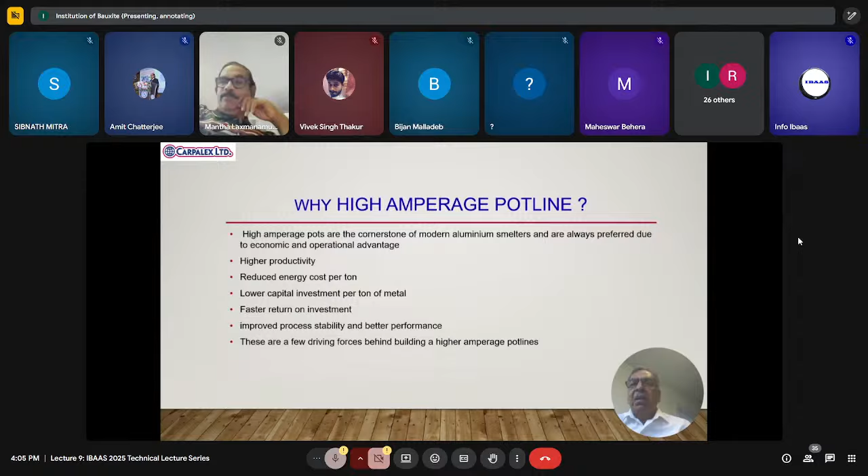Improved process stability and better performance. So that's what you will see more of, better pot performance, in the subsequent slides, which I'll show you. So these are the few driving forces which are behind building high amperage pot lines.

The next point, which I just want to emphasize, and don't take me wrong that I'm endorsing, it's nothing like that, but I just wanted to share my experience. So the modifications in the anode design, lining improvement, magnetic compensation, and control strategies of DX Plus and DX Ultra Plus technology, where I have worked extensively, result in a highly stable and promising pot performance, which fits the description I just mentioned above.

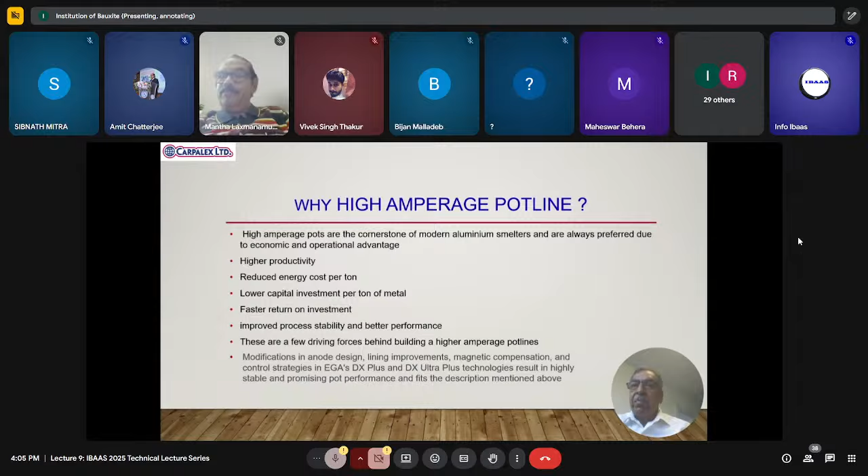So I just want to inform you that my presentation today is divided into two segments. One is the preheat. In preheat, I'm just focusing on the resistor preheat, not the gas-fired preheat. And the second part is the bath-up or the startup. So let's see what are the steps which are followed in the preheating. So why do we preheat? What is the objective? Pot preparation for the preheat: how do we prepare the pots? And raw materials. Mainly the raw materials, as you know, are crushed bath, pure crushed bath, or maybe cryolite, graphite, or petroleum coke, or soda.

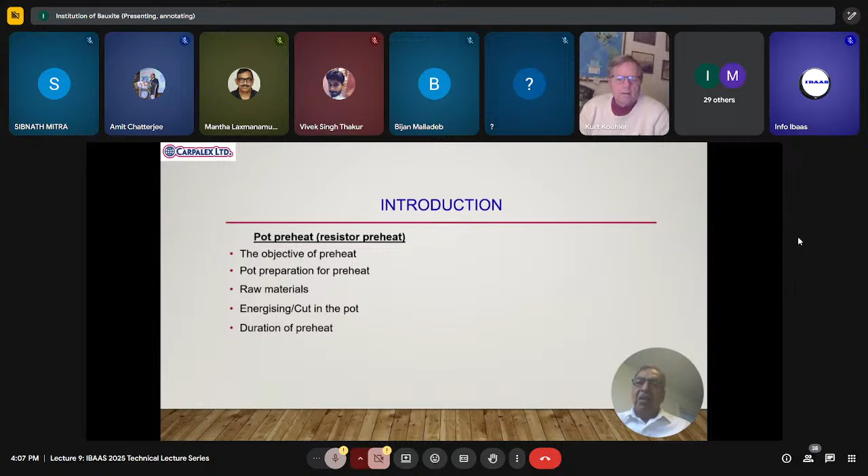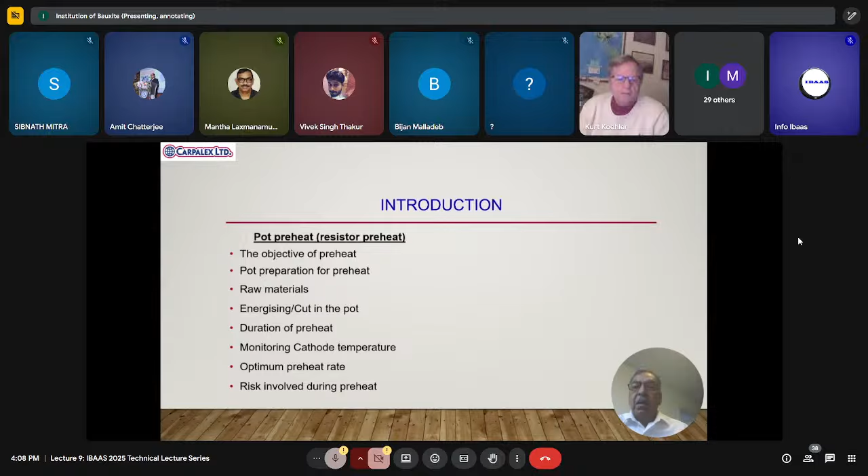So let's go to the next step. After the pot is prepared, we energize the pots, we cut in the pots. Some places use the term energizing, some places cut in, some places startup. But actually it is not a startup, it's just energizing. We have not yet started the pot at this stage. And what should be the ideal duration of the preheat? And what should be the rate of preheat? Then once the pot is cut in, we have to monitor the cathode temperature and other parameters, of course. I already mentioned optimum preheat rate. And what are the challenges and risks involved in the preheat? We'll discuss all this in the subsequent slides.

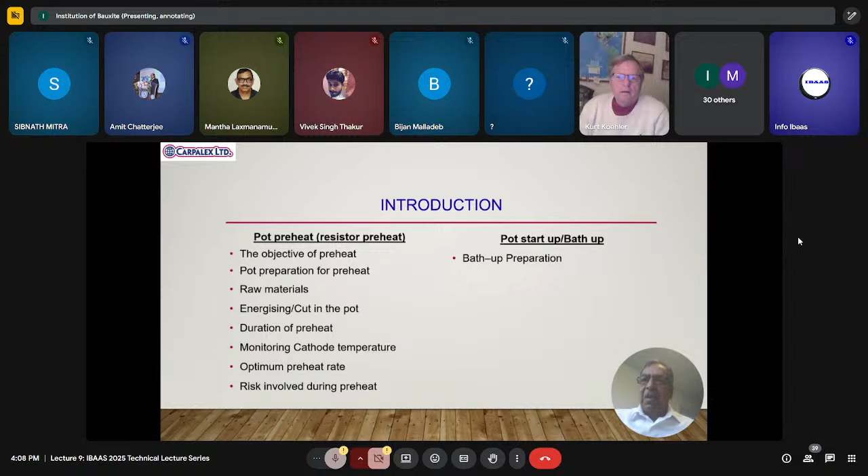And as I mentioned, the second segment is the startup. So what are the steps we need to follow? Bath-up preparation. Here I don't mean how to generate bath. Bath-up preparation means the pot is already preheated, it's just a couple of hours before: how do we prepare to tap the bath? We'll see in the next slides. Then comes the bath pouring. This is also an important point: we need to pour the bath in a very gentle manner, and you have to ensure that as soon as the metal comes, we stop. But we'll discuss that in the next few slides.

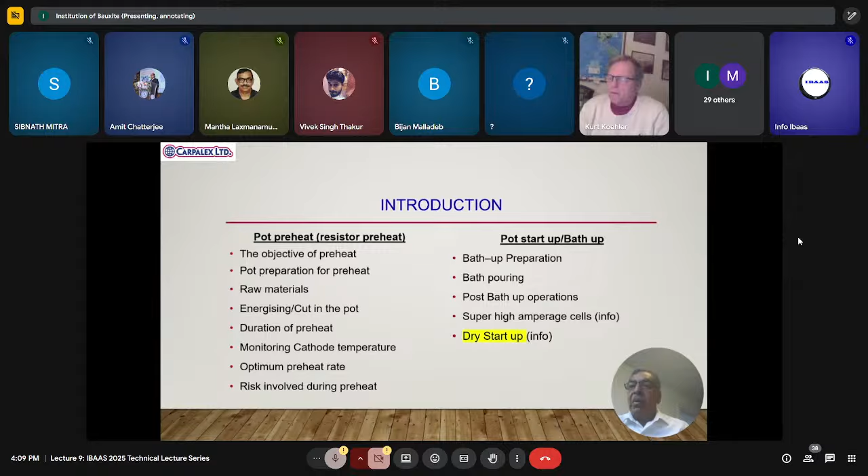Then once the startup or the bath-up is done, what are the post-bath-up jobs which we need to do? So post-bath-up operations. And then I have a couple of slides for the super high amperage cells. These are not today's main focus, but just for information's sake, I thought I must put a couple of slides. This is again the dry startup. I will not discuss it, although it's very important. Dry startup and early life are both very important parts of the startup, but unfortunately I do not have enough time. Probably in future there will be a separate subject for the dry startup and the early life.

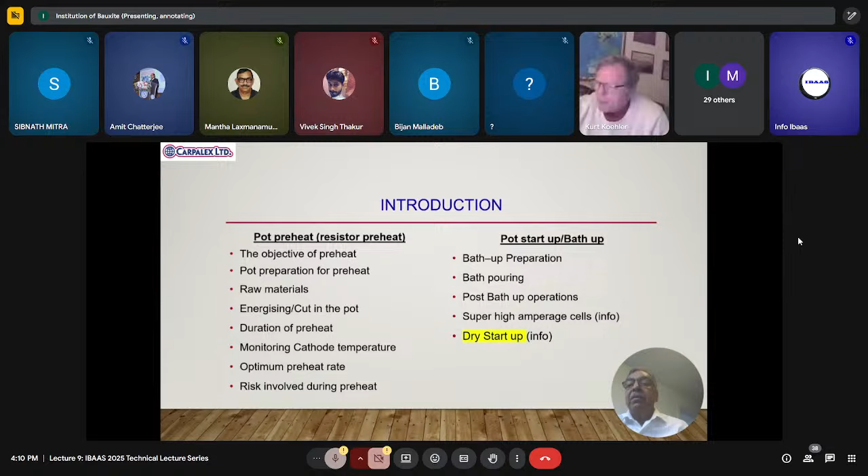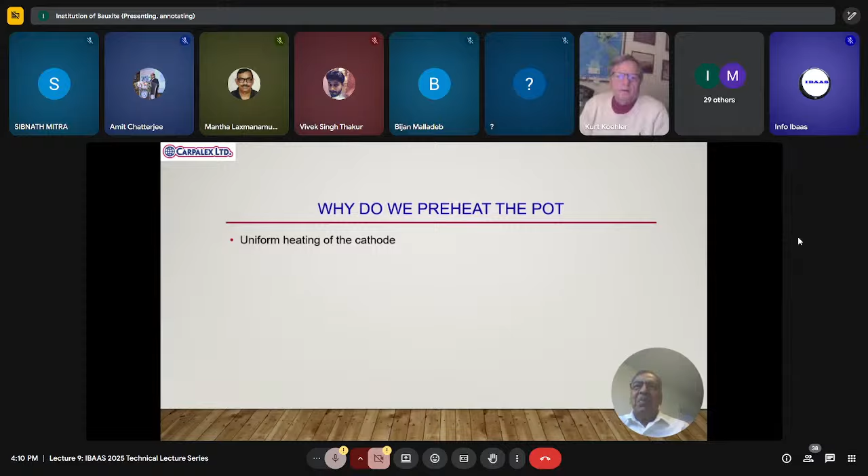So as the first point, objective of the preheat. Why do we preheat the pot? The main objective is the uniform heating of the cathode. By uniform heating, that means cathode temperature should be as even as possible, with the minimum gradient. Also, it's not only the cathode preheating, it's the preheating of the lining as well. So that is one of the main objectives.

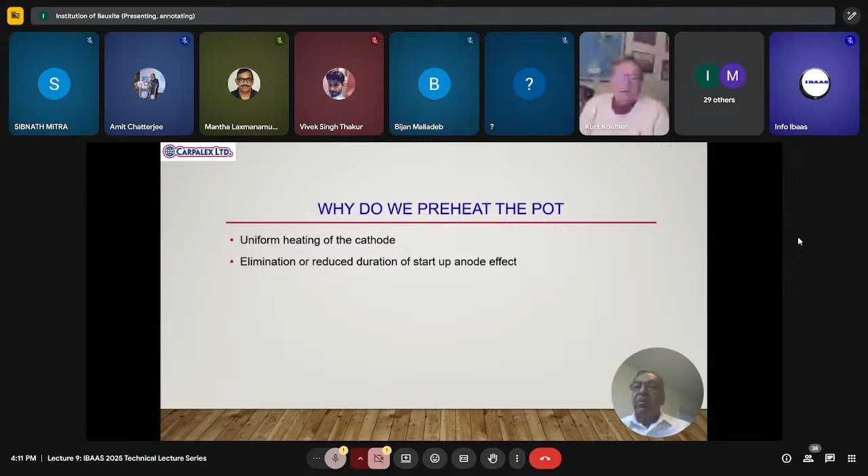Elimination or reduction of startup anode effect. If your pot is very well preheated, you will probably eliminate the first anode effect. Some technologies, some people prefer to have one first anode effect. To bring cathode block temperature close to 900 degrees centigrade or more; more is always preferable. In the technologies where I worked, we have achieved up to 950, 960 degrees centigrade as well. Then quick stabilization of the pot after bath-up, low voltage. Again, it all depends upon the preheating, so we stabilize the pot faster.

So reduction of the risk of bath and metal infiltration. So obviously, if the pot is very well preheated, the chances of developing the cracks are not there at all. So bath and metal cannot infiltrate in the cathode.

So elimination of cathode air burn, so hot spots. Sometimes it so happened that temperature touches 1100 degrees centigrade below some of the anodes, and then it's very risky. We start oxidizing the cathode, and so these are some hot spots which are developed.

And protection of the lining, of course, as I mentioned earlier, the lining is also protected if it is very well preheated. So chances of leakage through the lining are not there because it's very well baked.

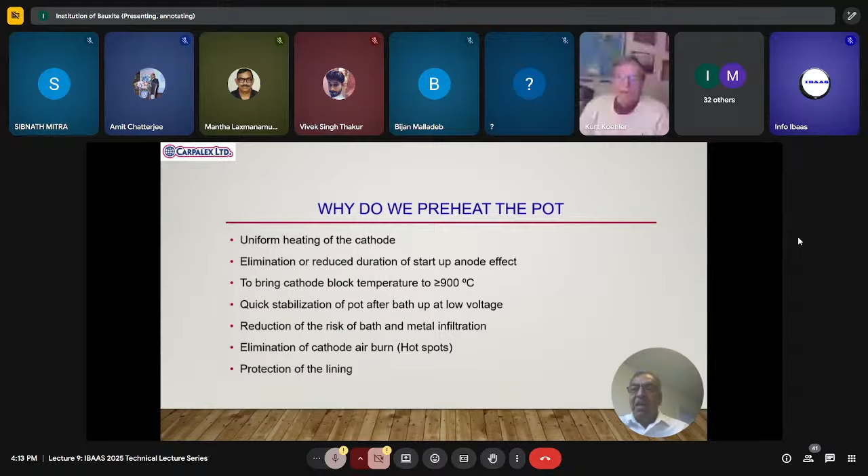So pot preparation for preheat. It's a very, very important point here, because if a pot is perfectly prepared, its preheating will be very well done, and post bath-up conditions will be very, very favorable, and it will help. So this particular point, the preparation of the pot for the preheat, must be done very carefully.

So there is a very extensive checklist before a pot is handed over for the preparation, maybe 45 points, and it starts from collector bar flexible connections to the superstructure hoppers and checking of breaker feeders, the beam movement, etc. It's done by a separate crew actually. Although it comes under the startup team, it's a separate crew which does that. And then they hand over the pot to the pot preparation teams.

So basically under the startup team, you can have many teams as required, but an inspection team is generally a dedicated crew. And same thing with the startup preheating crew. That is also a dedicated separate crew. So once they clear that this pot is ready for the preheat, we start preparing the pot.

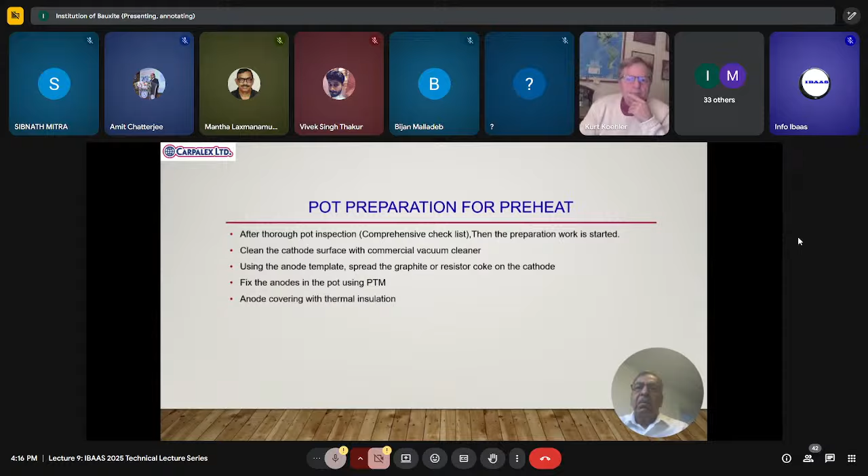Anode covering with the thermal insulation. This is also an important point, just to avoid the heat losses. So the gaps between the anodes, however small, are covered with the thermal insulation, or what we call Kaowool, or you can say glass wool, or any insulation.

Then next is the preheat flexibles. So we fix the preheating flexibles. Of course, before that, the steps. I already mentioned that it has to be properly insulated. And then the side wall and the end wall are loaded with the crush bath and soda. Generally it's a sandwich covering: first we put the crush bath, here a pure bath rather, and then the soda, and on top of that again a crush bath.

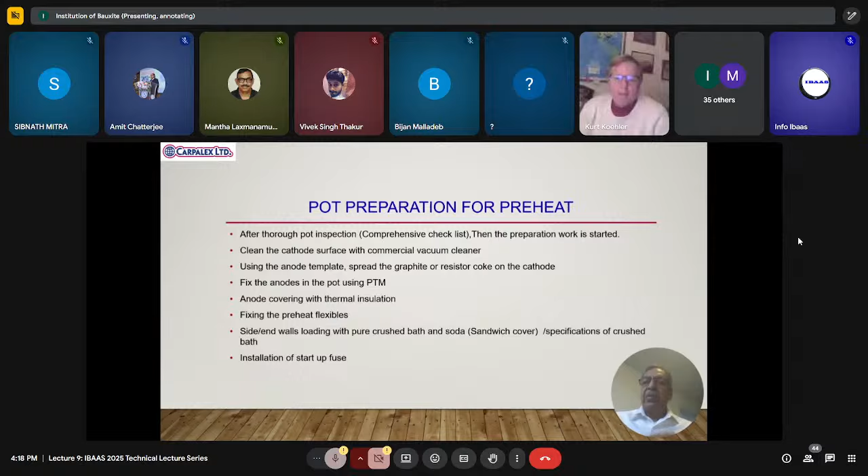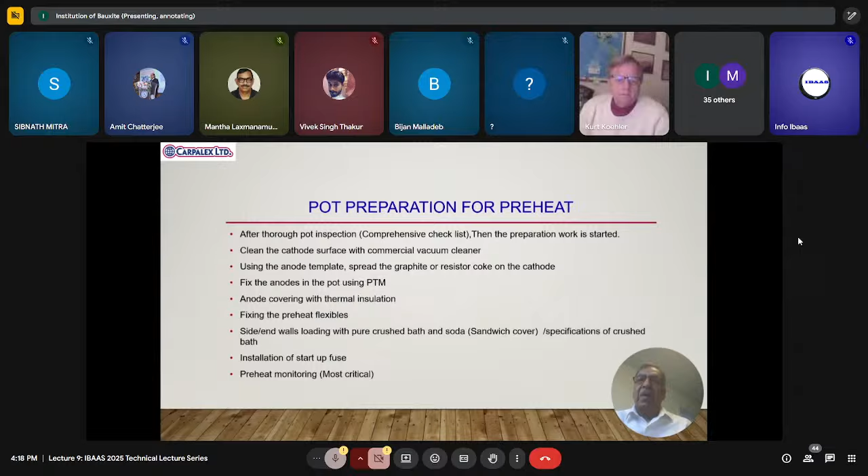So then installation of the fuse plate, that is the startup fuse, and then the preheat monitoring, which, as I mentioned, is one of the very important aspects. So I'll go to my next slide.

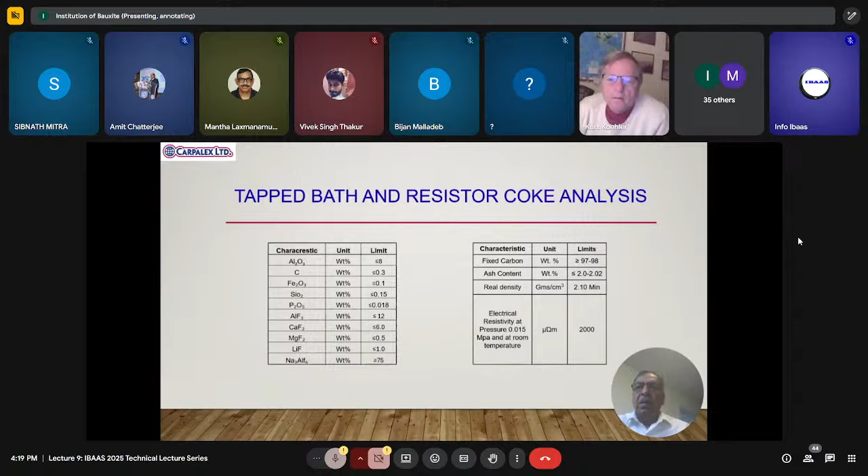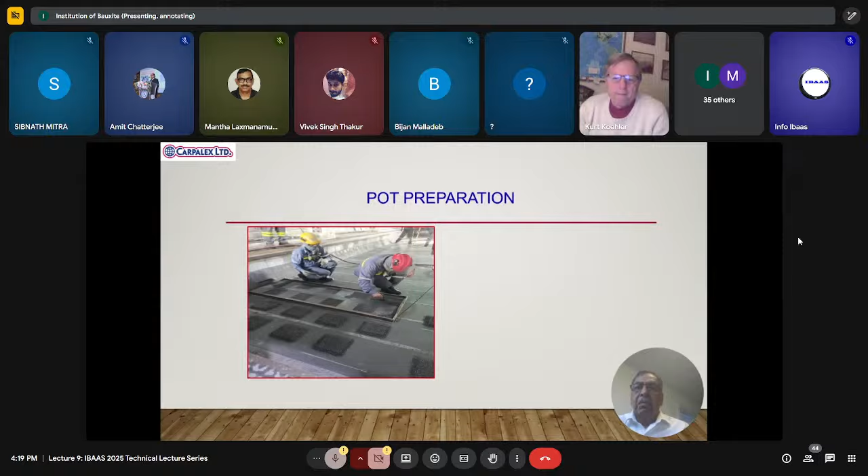Now my next slide is the pot preparation, which I'm continuing. So some steps. You started seeing the picture. So as you see, this is a template, and this template is exactly the size of the anode. I mean, you can imagine how big an anode is.

And these are the square resistor coke bed. So every technology has their own pattern. Some places they use the square, some places circular.

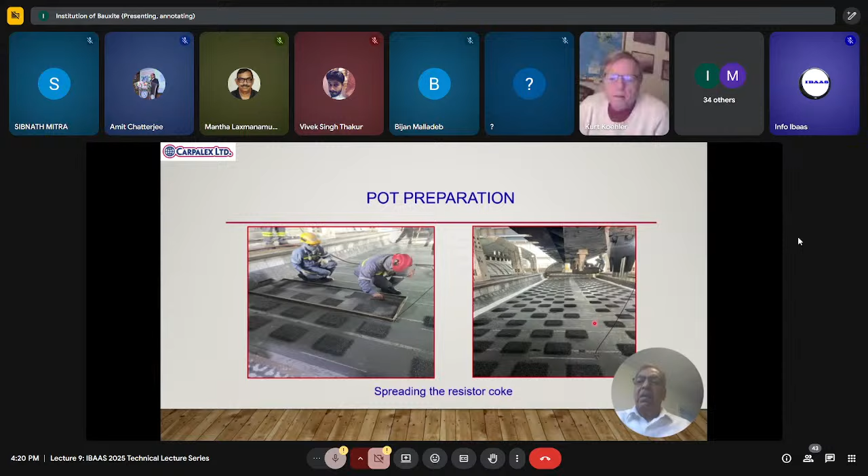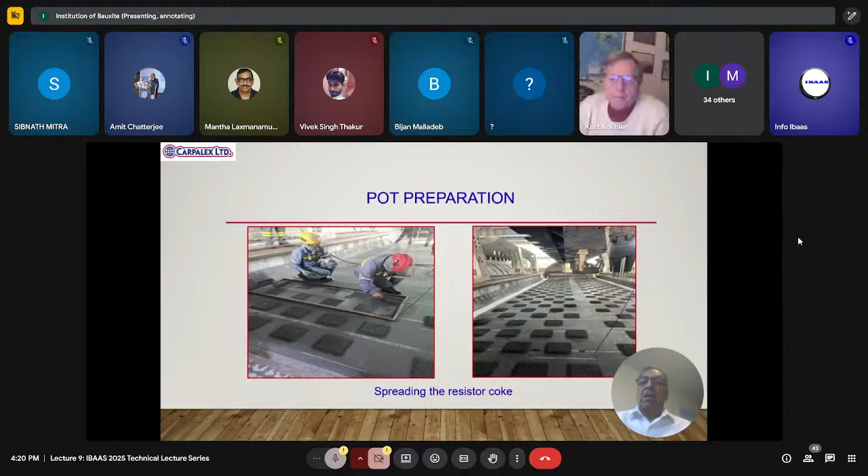I should mention that in the center channel, generally under the 5 breakers or 4 breakers, on the size of 400 to 500 kiloamps, there are 5 breakers. So under the breakers, the hole is done on the cathode and thermocouples are installed, just to take the temperature. So let's go to the next screen.

This is also pot preparation, but a different technology. You could see different anodes. I was telling you that the gap between the two anodes is covered with insulation. So that is what I meant.

You could see that on the back wall it's kind of blocked, so that once this back wall is covered with the crushed bath, nothing goes inside. It remains there. There are plenty of materials available for this - some people use cardboard. Of course it generally burns, but hardboard remains there, it protects.

Some places they use steel. But this one is an insulated material, so it remains there, so there is no chance of issue. The steel plates which are used generally are not preferable these days because they get warped after the heating.

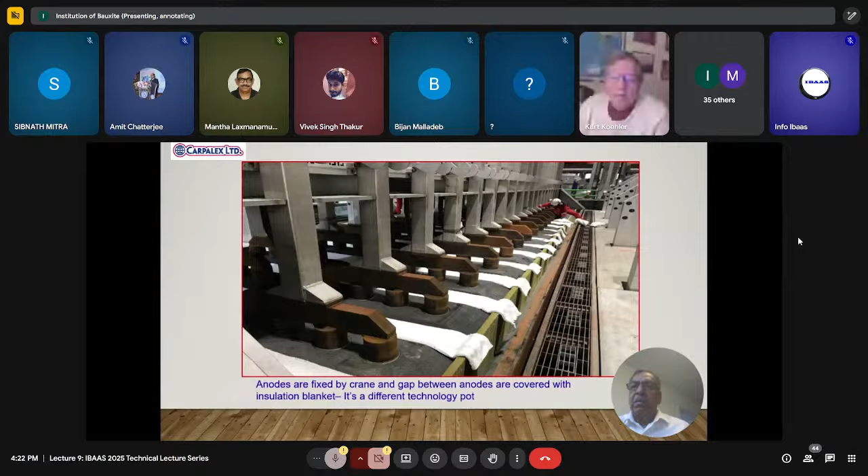So this is a different technology pot which we have seen in the previous slide. Let's see what's there in the next slide.

Here you could see that there are some chalk marks on top of the stubs or the pin - some places it's called pins or the stub. These chalk marks are done to facilitate the covering of the anodes. So anodes are covered only up to this height and not more.

And this is only during the preheating. This doesn't apply for normal operation. So this is again an important point - it's only for the preheating, because some technologies have certain designs for heat losses, just to maintain the thermal balance during preheating.

So this is covered, and once the operator sees this, it's controlled in a better way. He knows that he has to cover the anode only up to this side. On the right side, you could see that the pot is totally prepared after this and all through. Basically, it's covered with crushed bath, soda, and again crushed bath.

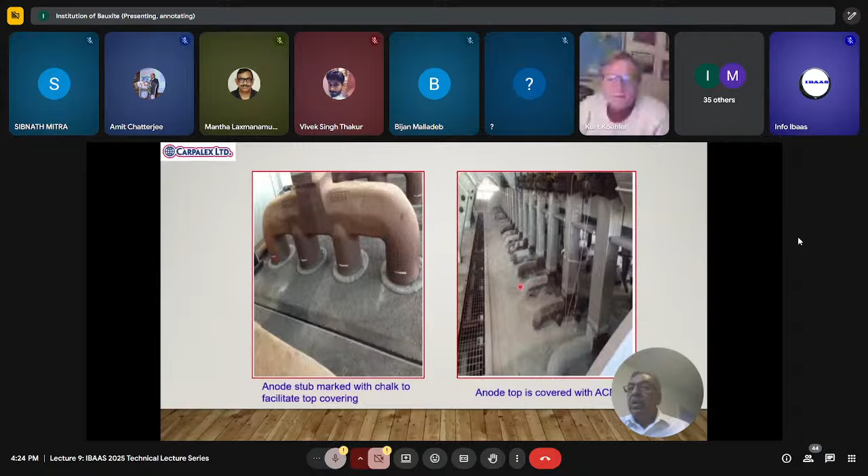One more thing which is very important - the 4 corner anodes, one here on the tap side too, and the duct side too. In some technologies, on the duct side there is a door. It's very important, because when you start the pot, you skim the carbon from both ends. So these 4 corner anodes are very well covered, and also on the deck plate we put some thermal insulation just to avoid heat losses as much as possible, because we lose a lot of heat from the sides.

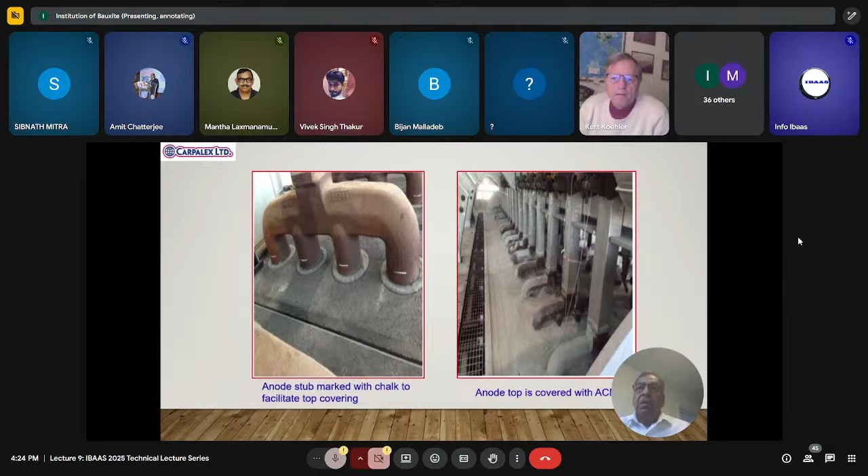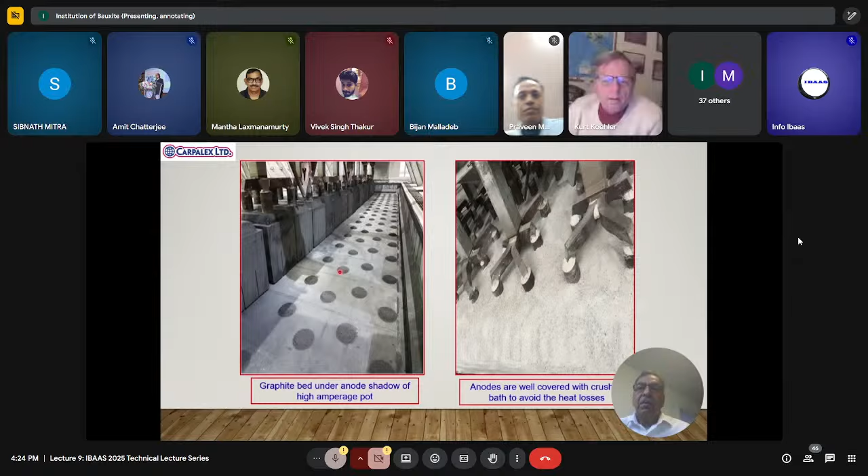So let's go to the next slide. You could see that here the graphite bed is circular, and as I mentioned, it's a different technology, not the one which I showed you before.

Here, if you could see, these anodes are covered almost full, right up to the pin, which was not the case in the previous slide. And also you could see that this is not ACM, or the anode cover mix.

This is pure crushed bath, and generally this pure crushed bath is used, and this type of arrangement is done for dry startup, because after a certain period of time, say 44-45 hours, you could see that the crushed bath is already started melting, and people use the crushed bath or pure bath from the top of the anode to put it into the center channel. That is the purpose.

These anodes are covered with pure bath, and not with the anode cover mix, because anode cover mix has about 45% alumina, which is not desirable for the startup, dry startup rather. So I'll go to my next slide.

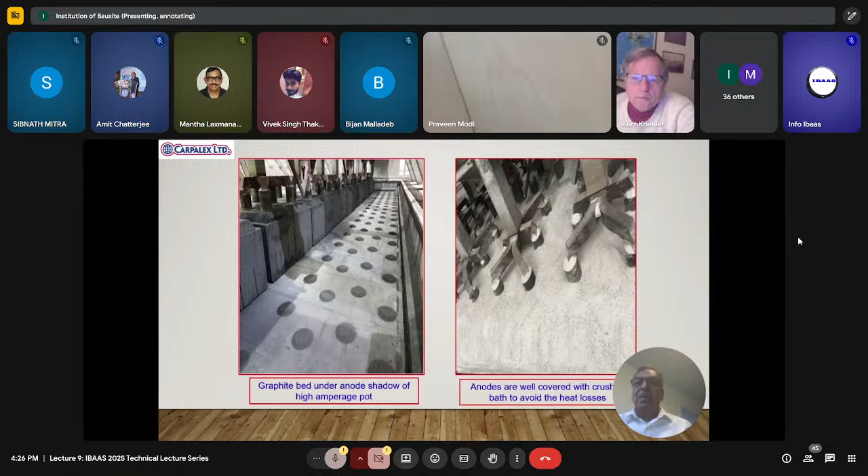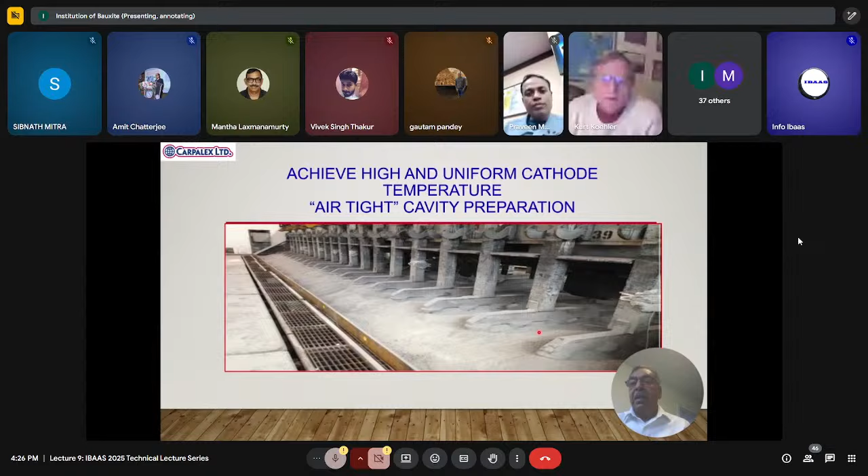So it's just again a picture. You see that what is mentioned is achieve high and uniform cathode temperature, airtight cavity preparation. Again, you see that it's covered completely. But you could see that there is enough gap between the yoke and the top of the anode covering.

So it is very critical. It has to be, so that air should pass through, just to make sure that these pins are not getting red hot. I'm not very sure whether this is a dry startup arrangement, but I can tell you that in this technology, the temperature they reached about 960 degrees centigrade up to the preheat. So I'll show you the graph in the next technology, as to my next slide.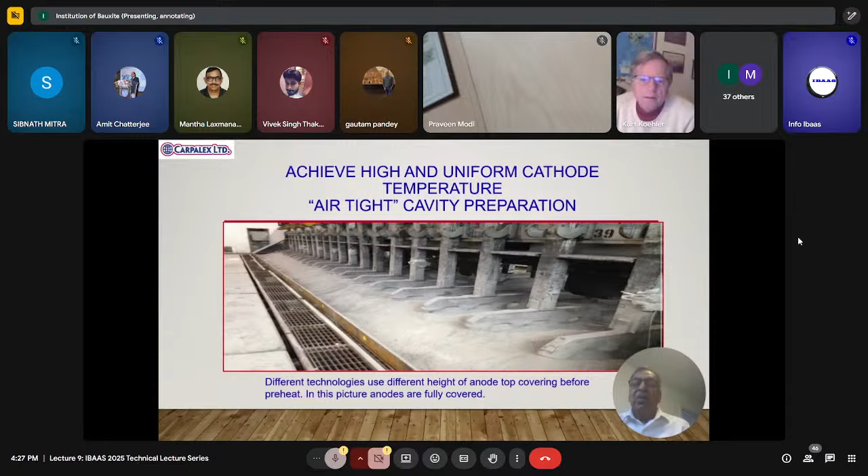So I was mentioning you before the fuse plate. So what is the fuse plate? Fuse plate is simple, an aluminum plate. There's a hole in between, and its thickness varies depending upon how much is the kiloamps. So if it is higher amperage, the thickness goes a little bit more.

So in case of new pot line, when we build the new pot line, this fuse plate is installed, or fuse plate is welded by the construction team. But what happens when it's a second generation pot or third generation pot, do we still fix this? And if yes, then how? We can't weld on the live pot, 500 kiloamps, you can't weld it. So what do we do?

So generally, there's a, I think it's a used Hilti gun. So there are two kinds of rivets. So we use the Hilti gun to put one rivet here and one rivet here. Contact is not as good as it is welded, but to some extent, yes, contact is there.

So it's better to put rather than not putting at all, because when we remove the last wedge, it's very important that this fuse plate is there in place so that it reduces the spark which is generated by the last wedge. And that is the main reason that in the generally higher amperage pot lines, this fuse plate is used. I'm sure it is used in even 200 kiloamps pot also.

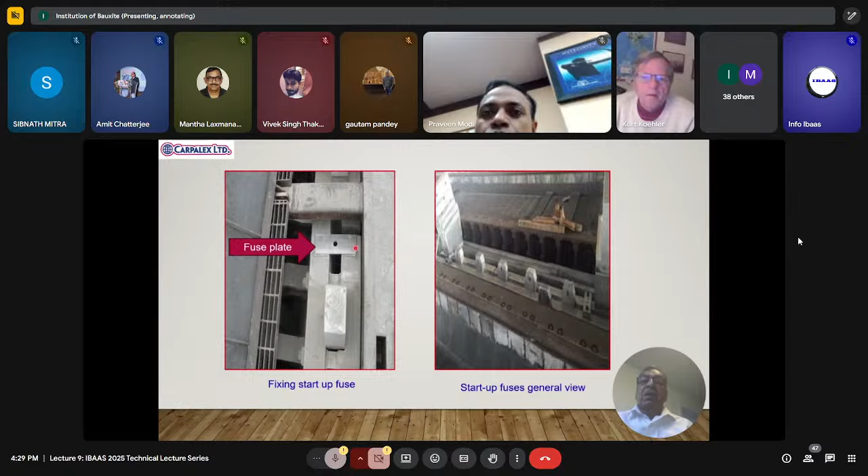And on the side, this is a general view of the starter. Here you see that startup fuse is fixed near the riser. It's near the riser, so it's the first riser. Some places in the second and third generation pot, they use even the nuts and the bolts. But I do not know whether it is good to do it with the nuts and bolts, I don't have any comment on that.

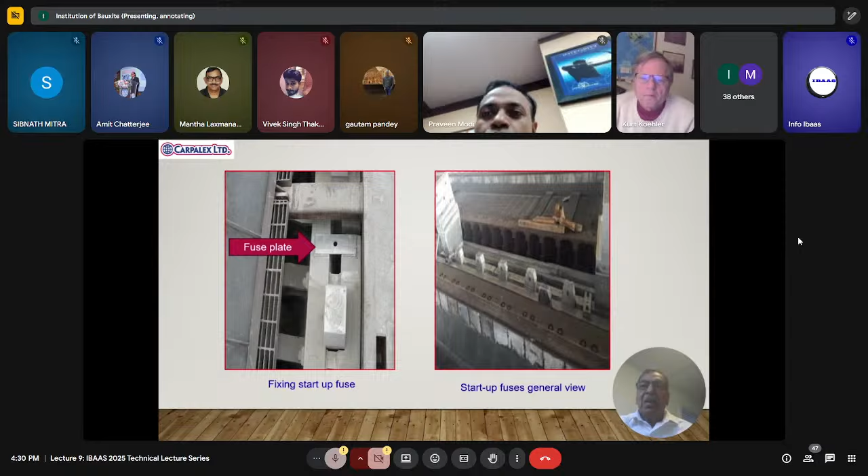So you see the flexibles are there. Here one more important point is there that, although it was there in the checklist earlier, the startup in charge has to ensure that the duct damper is totally closed. For the gases, it is in the closed position. So it is 100% closed, but there is always a gap so that in the periphery of the damper, some gases always go there.

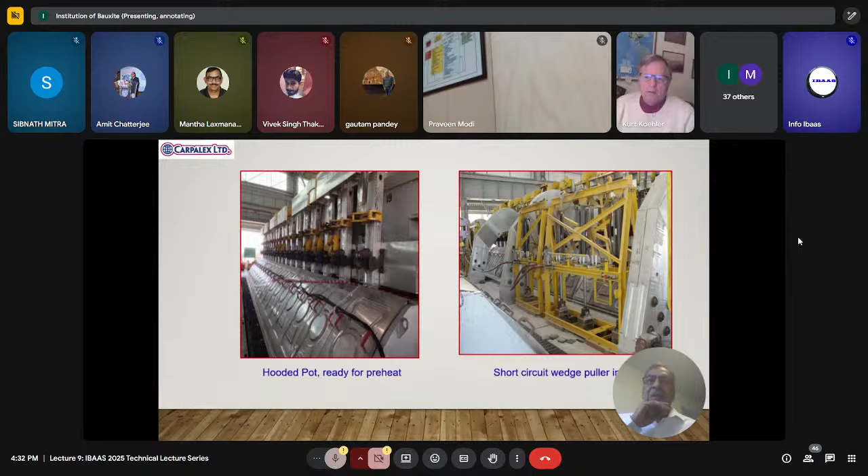Here the wedges are removed immediately, one by one. So one wedge is removed, once it is done, the second is removed. Second is done, third is removed. So this way, the whole pot is in circuit within a short period of time at full load. It's a full load, so we're not putting any shunts on this pot. So let's go to the next slide.

So cut in and energizing the pot - this is a very, very critical operation. Prior to cut in the pot, we have to ensure that, as I mentioned, the dampers are in closed position. Somebody has to re-verify that.

Using the wedge puller device, as we've seen before, all the short circuit wedges are removed one by one, but not in proper sequential order. So you could remove number 2 first, or number 6 first, whatever you want to. It's not that we have to go sequentially.

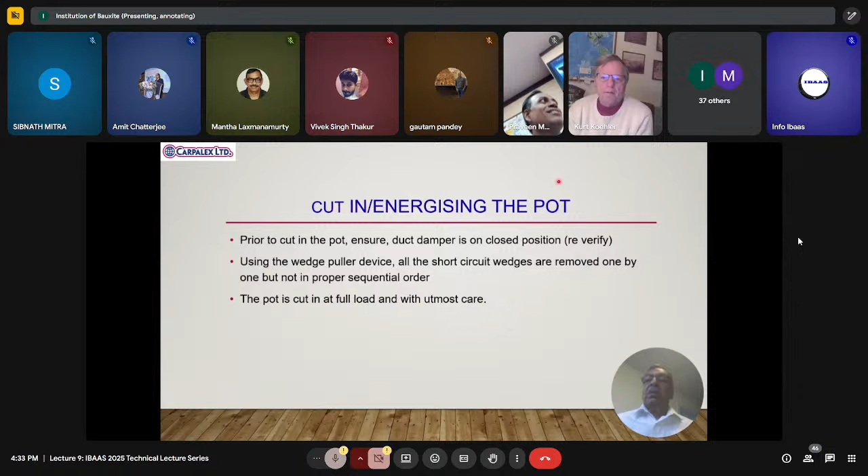The pot is cut in full load and with utmost care. But since this is a very important operation, energizing the pot, some senior man should always be there, and also the power plant is on standby. So in case of any eventuality, any emergency that comes up, they're always in touch on the radio.

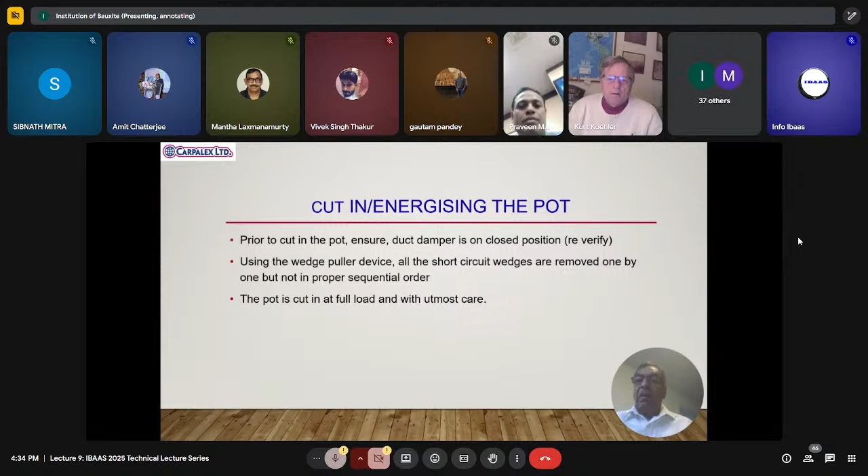So what can happen? For example, I'm removing the wedge and one wedge is stuck. If one wedge is stuck, what happens? It will start getting hot because the whole load is coming on that. Eventually it will melt, and then there's an open circuit situation. So just to avoid these kinds of things, the power plant is on standby, and the maintenance crew is also there. This is an important operation, and therefore a senior person should always be there when we are cutting the pot.

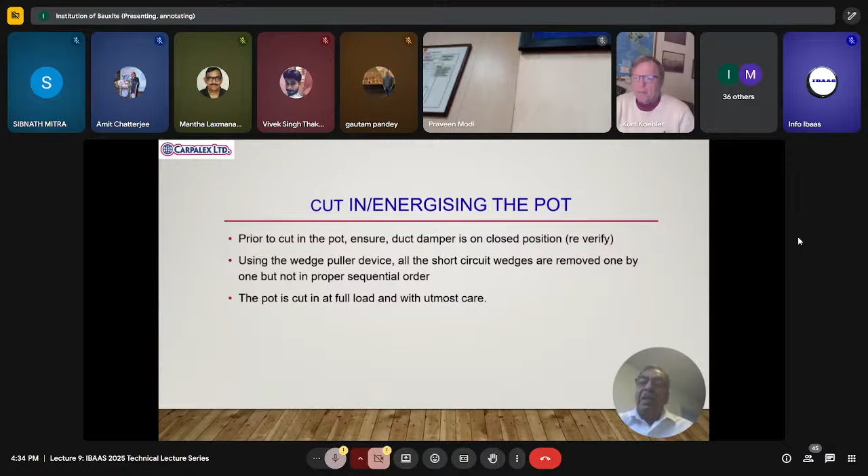Let's go to the next topic: monitoring of the preheat. Yes, the pot is preheated, but our job is not yet done for the 48, 50, or 60 hours. The objective is to have good current distribution in the anodes and acceptable voltage drop between the anode rod and the beam, or rod and flexibles, since flexibles are connected to the beam, rod to the beam. Uniform current distribution is very important, because if some anodes are drawing high or low current, you can't expect a good preheat.

These days, some vendors provide devices where you can monitor the current distribution in real time, and the operator doesn't need to go and check the current distribution of each and every anode. Facilities are available, but technology is much more advanced these days. There's also contact voltage drop monitoring. There's a schedule, and periodically somebody has to go and do this operation.

Cathode surface temperature: as we mentioned earlier, during preparation, thermocouples are installed. People generally start taking cathode surface temperature readings after 44 hours, because it's picked up later. Our aim is to have at least 900 degrees and above, so it's not picked up in 20 or 30 hours.

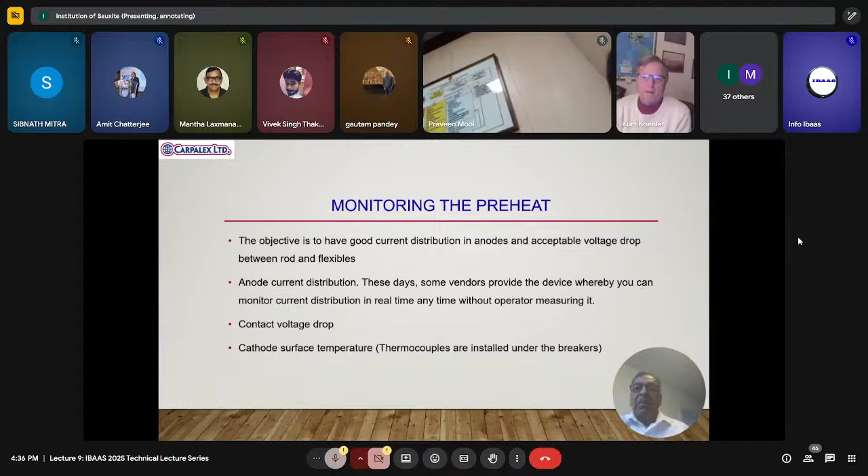And even if we want to pour a liquid bath into a 1000 degree preheated pot, there is hardly any gradient between the liquid bath and the cathode temperature. So it's very, very good, very ideal.

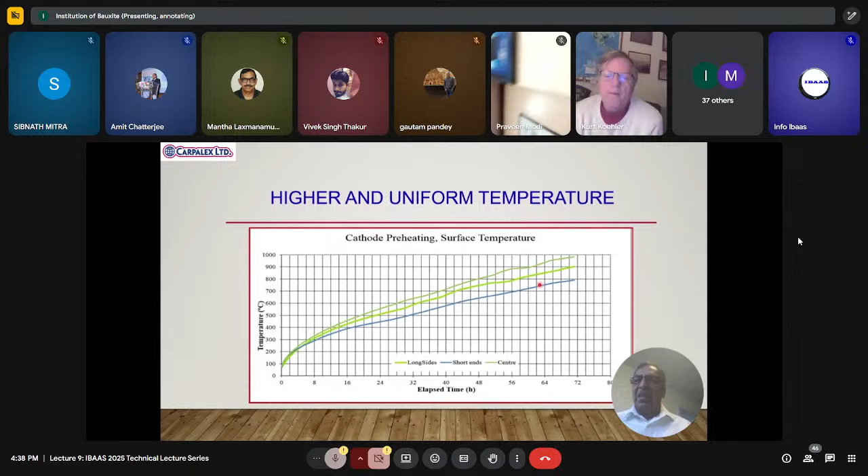So, abnormalities during preheat—what can happen? Uneven current distribution, yes. If there's uneven current distribution, the cathode will not be preheated properly. What else can happen? Hot spots below some anodes, where temperature might reach 1100 degrees centigrade, as I mentioned before, and again, that's not desirable.

Insufficient preheat temperature means temperature will not be uniform, so we cannot bath up the pot if preheating is not done properly. Red stubs or red pins can occur because some anodes are drawing high current. Anode burn off is typically a case of poor anode sealing, poor quality of anodes, and poor quality of pot preparation—probably the contact is not very good.

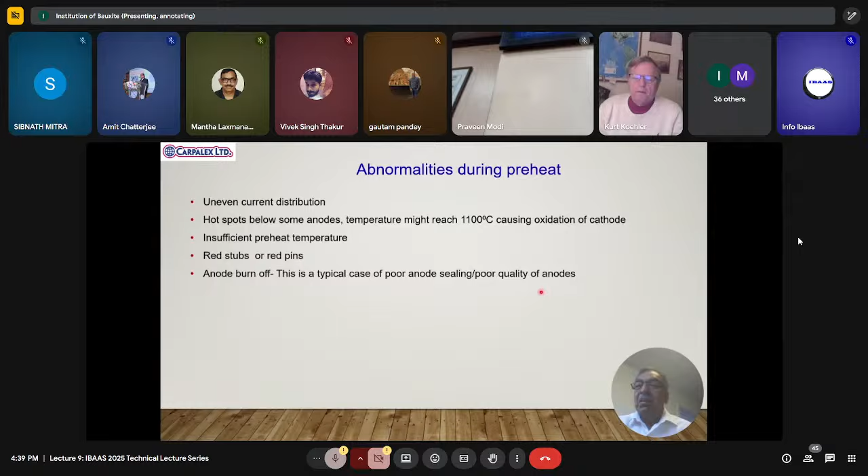It's possible during preheat, although rare, but during preheat I have seen anode burn off, not only in the bath-up.

Higher or lower rate of heating—if it's very high, that's not desirable, and if it's very low, that's also not desirable. So there should be an ideal rate of preheat, considered to be 15 to 20 degrees, with 15 to 18 degrees being very ideal. Again, it depends on technology to technology, how they maintain heat balance during preheat. For graphitized preheat, an average rate of 15 degrees centigrade is considered to be good.

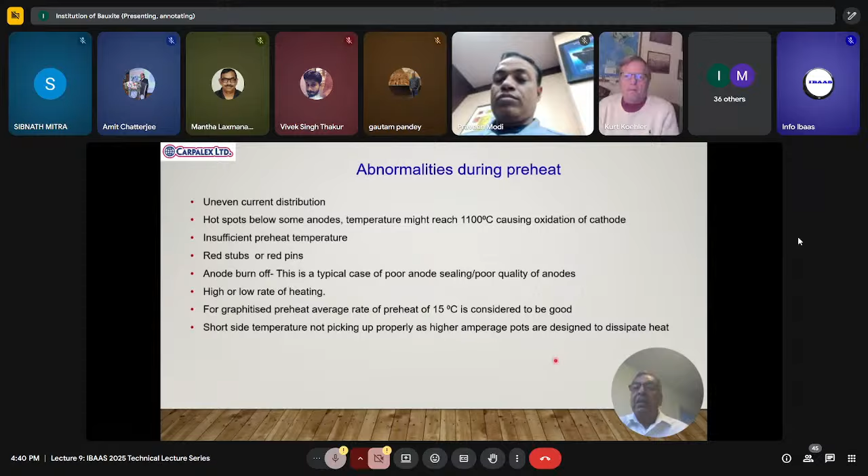Short side temperature not picking up properly, as high amperage pots are designed to dissipate heat. Yes, that is true, but still the gradient should not be very high. So that is why you have seen that I mentioned that on the short side we try to put insulation on the deck plate, and even on the four corner anodes we put insulation.

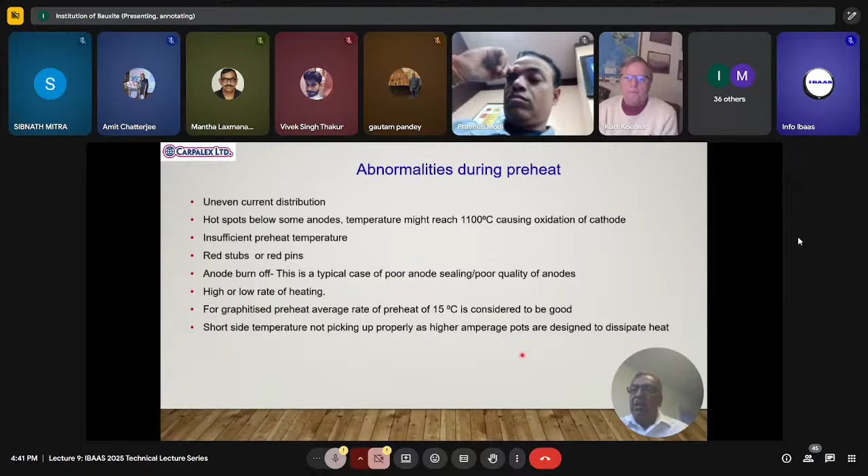These challenges require advanced preheating strategies such as computational fluid dynamics, CFD, for heat distribution, automated control systems, and robust safety protocols. So it's very important. So again, it's a design, how well the pot is designed. These are some of the abnormalities, not all. I cannot mention all, but if a cathode is very well prepared, anode stems are very well grinded, the beam is grinded, then these problems are eliminated. I don't say 100%, but to some extent.

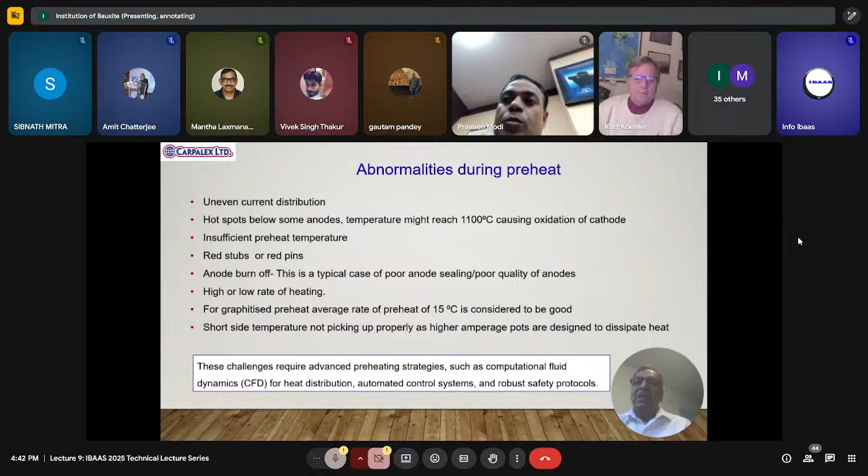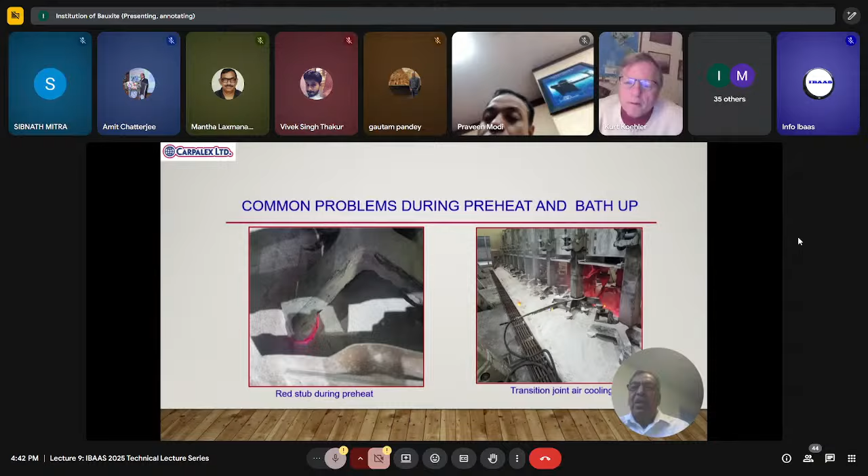Common problems during preheat and bath-up. You have seen that I mentioned red pin or red stub. So this is again during preheat, and you could see on the right side that this is a clad, that is welding between aluminum rod and the yoke. So it gets heated up. Sometimes it gets red hot. So the chances are that if we don't address this problem, then it might drop. Clad may fail, so the rod is separated and the anode has fallen off.

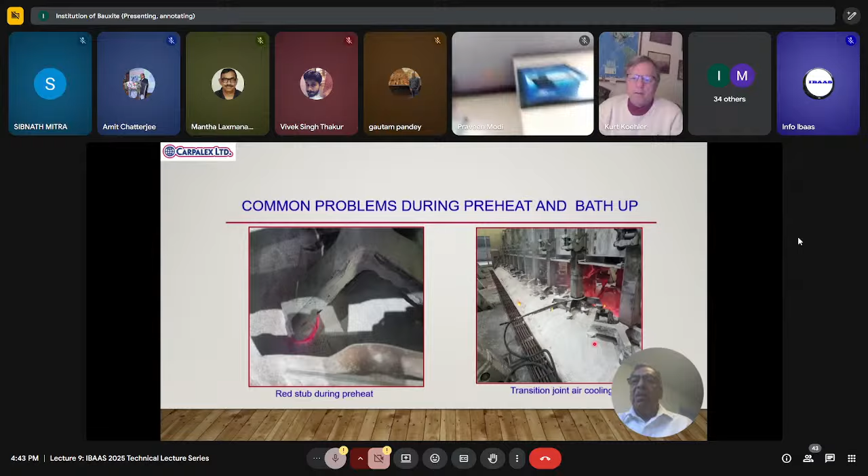It's a burn off. So just as a precaution, when this bath-up happens, the people have to go around and check everything is normal. Of course, every technology has their own procedures. But if it is properly done, these kinds of things are avoided. If the anode is very well sealed, if there is no problem with the initial anode which is fixed, maybe initially there is a crack or minor crack in the transition joint, then the chances are very high that we may have problems during the bath-up or even during the preheat.

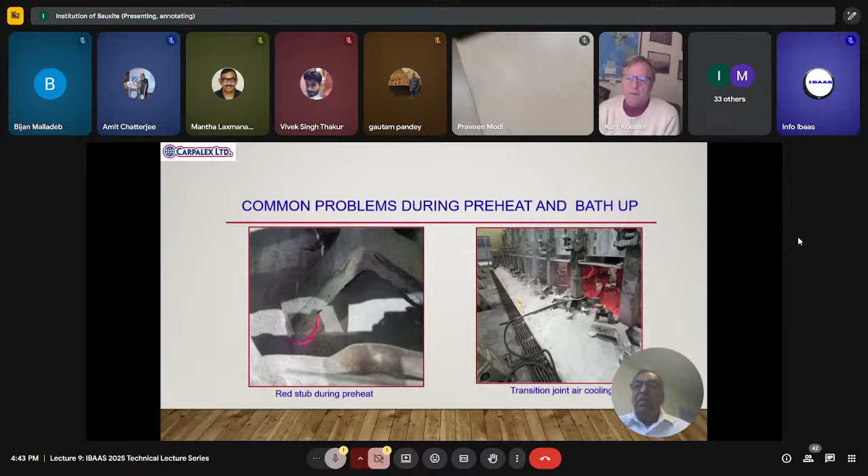So we come to the next part, that is the pot startup or the bath-up. These are the bath-up stages: bath-up preparation, which is preparing the pot for bath-up, and post bath-up operation. Now before bath-up of the pot, what should we do? These are some very basic and fundamental steps, and all of you know about it, but I thought I'll just mention it. We tighten the anode clamps, mark the anode reference with the chalk line, remove the flexibles, and remove thermal insulation blankets. Any startup or bath team knows about these. These are the important things we need to do before we pour the bath.

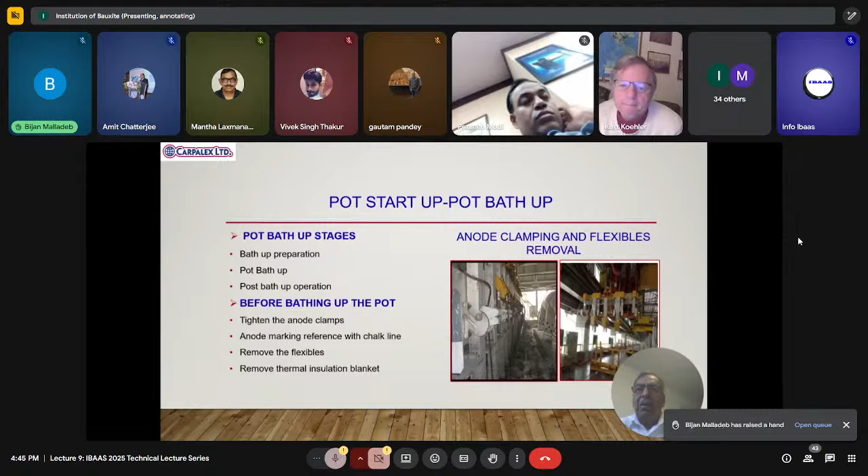So I just put some pictures here: anode clamping and flexibles removal. You see that the anodes are tightened here. The clamps are tightened, and once the clamps are tightened, the flexibles are removed. So let's go to the next slide and see the bath pouring step, how we pour bath.

A predetermined quantity of bath, 13, 14 tons, maybe 15 tons. Again, it depends upon the kiloamps and which technology, because the requirement varies from technology to technology. Some people pour 14 tons, some 15 tons, some pour 13 tons and 2 tons later. So it all depends. But in general, 13 to 14 tons of liquid bath is poured in a very controlled, gentle manner. It's not that we pour very fast and are not aware that maybe some metal is coming at the end. So we have to be very careful during the bath pouring.

The ideal temperature of the bath should be above 970 to 980 degrees centigrade. This is ideal, but if it is 1000 degrees, still it's better. Raise the anode beam while maintaining all anodes immersed in molten bath. Once the bath is partly poured, somebody at the duct side door, as I mentioned earlier, ensures that the anodes are at least half immersed in the bath, and then he gives an indication to the guy on the tap side. Then he starts raising the anodes.

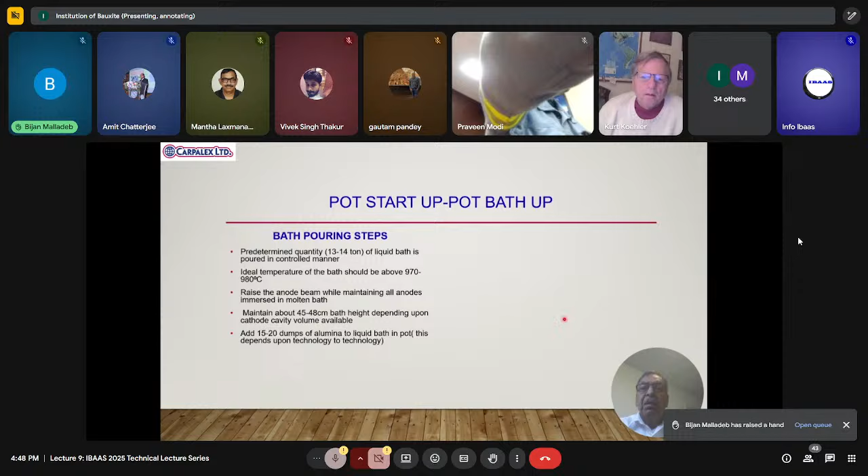because once the crushed bath starts melting and if you have anode effects. So, excuse me. Once it is done, some technology providers advise that we put some alumina dumps just to avoid instant anode effects. But using the tapped crushed bath, which is about 4 to 5% alumina, we can always avoid this. So some people don't prefer even charging these alumina dumps.

Pot voltage is maintained around 10 volts after the bath up, 9 to 10 volts. And normally we declare the anode effect at 8 volts. That is the threshold. But during the bath up, for the first shift, even at 10 volts, we don't declare the anode effect, because this is the requirement. We need to maintain so much voltage because we need to heat up the pot.

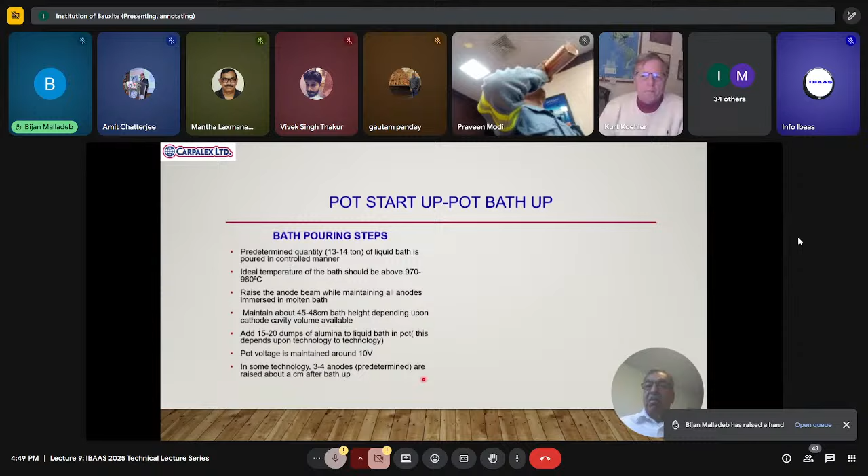In some technologies, 3 to 4 predetermined anodes are raised about a centimeter after the bath up. So again, it's a very controversial point. As soon as the bath up is done, because the pot is so long and the anode beam is so long, they say that probably in the middle, because of the structure, there are 40 anodes or 36 anodes or whatever it is, there is a possibility that the anodic plane is not uniform. So some places they raise 3 to 4 anodes by a centimeter just to maintain the proper anodic plane.

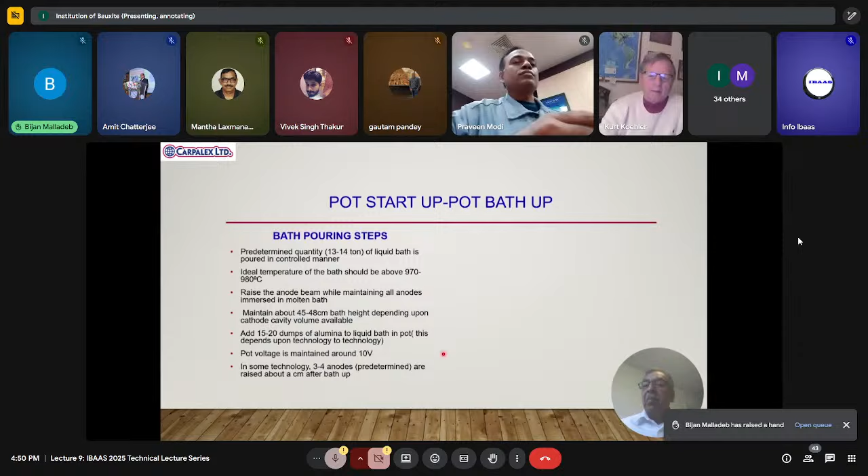Although the current distribution, when they check, we don't see anything. So again, as I mentioned, yes, it's a practice. Some places follow it, and there is no problem in that. There's no issue if you raise an anode 1 centimeter. After 8 hours, in the current distribution, you will not see anything. Even during that shift, nothing wrong happens.

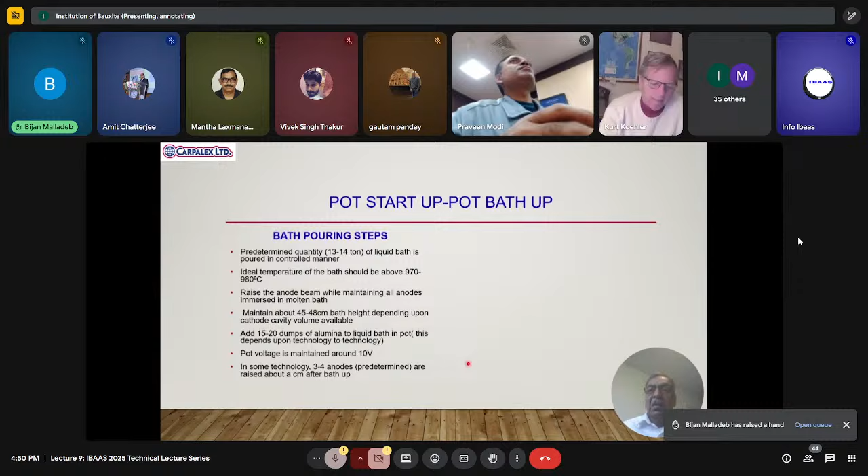So what's the next point? The gas stack damper is opened completely. Earlier I said that during the preheat, it was closed. Now it is open completely. What I mean by completely is that, of course, gas balancing has to be done, but whatever limit, the mark is there, we have to open up to that. This is just a picture which shows that the bath is being tapped for the startup pot.

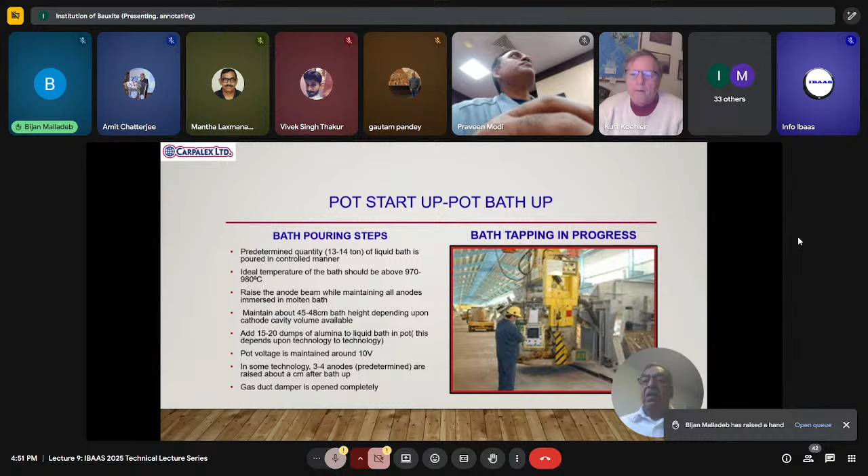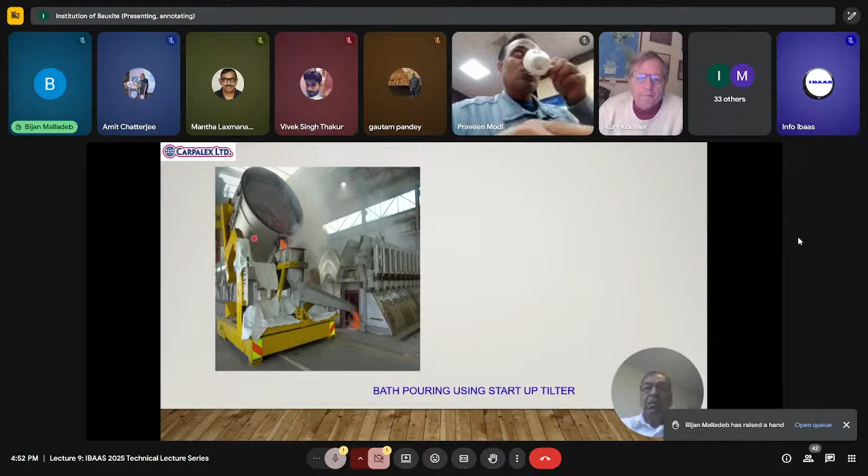Now, how do we pour this? This is a huge ladle, about 14 ton liquid bath, as I mentioned. So we use the startup tilter to pour the bath in one go. In some places, rather than pouring 2 ton, but it's not possible for such a big pot. So we use the startup tilter. I'll show you the pictures. This one is a startup tilter. This is a bath crucible. The bath is being poured.

Now, some places I think they use electrical energy to operate this startup tilter; the cylinders are actuated by an electric motor. Some places use a pneumatic motor, where they don't allow any electricity in the pot line, since it requires 400 volts. And I have seen the pneumatic motor also, it works very well.

So when we are pouring bath and almost done, you have to ensure that no metal goes with it. That is why it is very important that we pour the bath very gently. Also, sometimes a chunk of bath comes, and if you are not very careful, this chunk blocks, or maybe the bath will splash. So there is a risk to the people working around here. So the guy operating this startup tilter must focus his eyes on the bath pouring.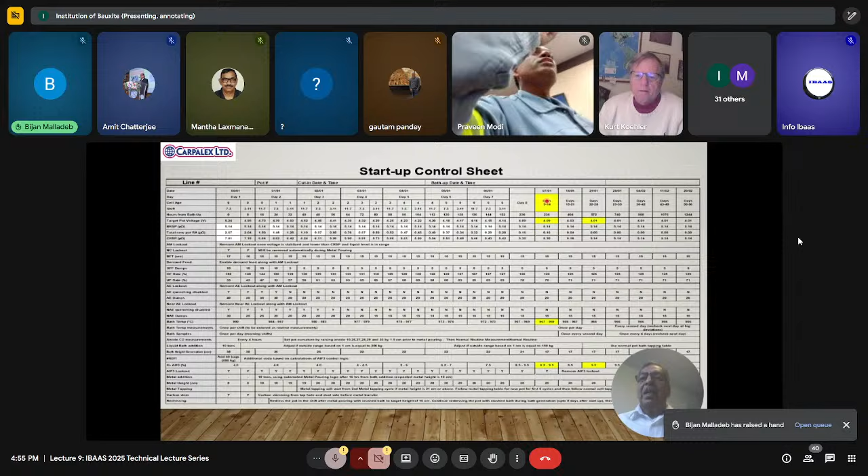But here we could see that parameters are within 2 weeks. The pot looks normal, which is fantastic. It's a very encouraging result. If the startup team sees that this is happening, that means the job they are doing is really fantastic. So it's a matter of pride for the startup team and of course the operation team that these kinds of results are there.

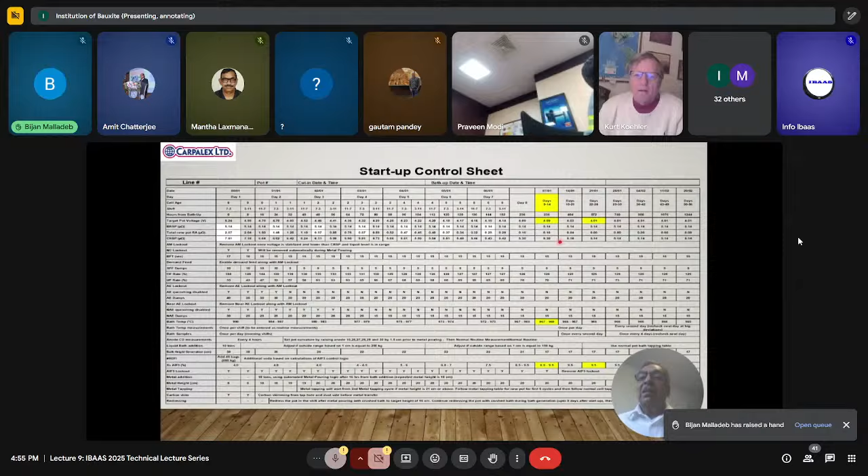So post bath up activities. Again, it's very important. Generally, we use a very small quantity of the graphitized resistor coke, which is mixed with graphite, so not much carbon is generated. After the startup tilter is removed, we need to do carbon dust skimming from both sides, both the duct side and the tap side. Soda addition is done as per the recommendation.

We have to keep monitoring the voltage and the noise level. If a little bit of noise is there, we have to check current distribution twice per shift after the bath up for the next 4 shifts. Again, it's a practice, and this practice varies from technology to technology. It's a very healthy practice if we measure the current distribution regularly.

And carbon skimming: we don't generate much carbon, but not to forget that anodes are made of carbon, so carbon is always generated. So we keep skimming for at least 4 shifts. Once the metal is poured, which is generally after 18 to 24 hours, then pot redressing is done, because the anodic plane is changed and you raise the beam, so a lot of crushed bath from the side goes down. I've already mentioned this 18 to 24 hours.

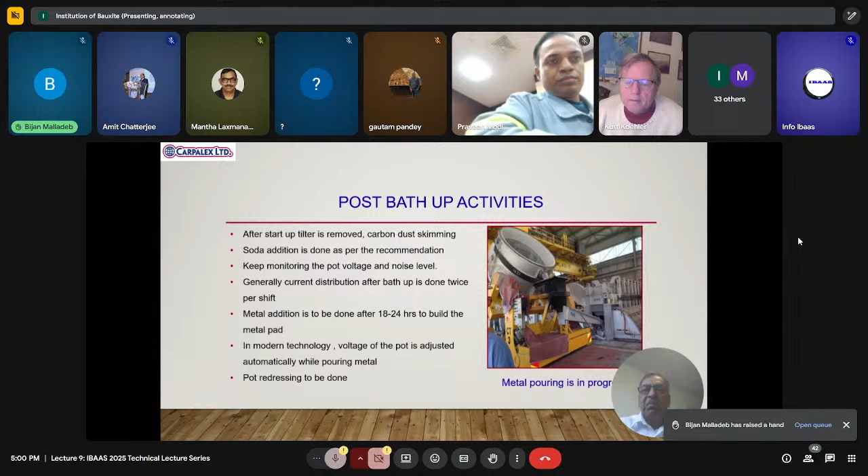I was mentioning earlier: what are the super high amperage pots? Basically, they are pots running between 550 to 660 kiloamps, and not many countries have them. There are 4 super high amperage technologies. What are the advantages? Lower capex, faster return on construction cost, high productivity and lower operating cost per ton of metal, basically the same advantages I mentioned earlier, and low specific energy consumption.

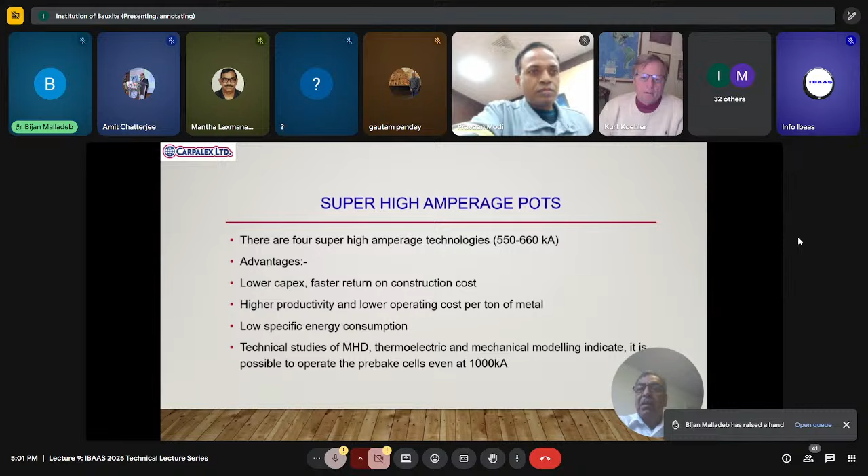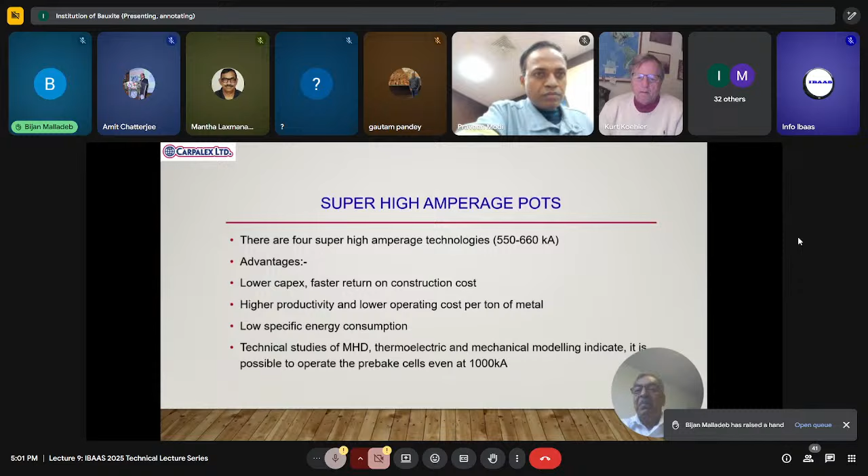Technical studies of MHD, magnetohydrodynamics, which basically controls the movement of the metal, especially the vertical component, and thermoelectric and mechanical modeling indicate it is possible to operate pre-baked cells even at 1000 kiloamps. So sky is the limit. After a few years, maybe we'll have 1000 kiloamp pots. So super high amperage pots, let's see what is there.

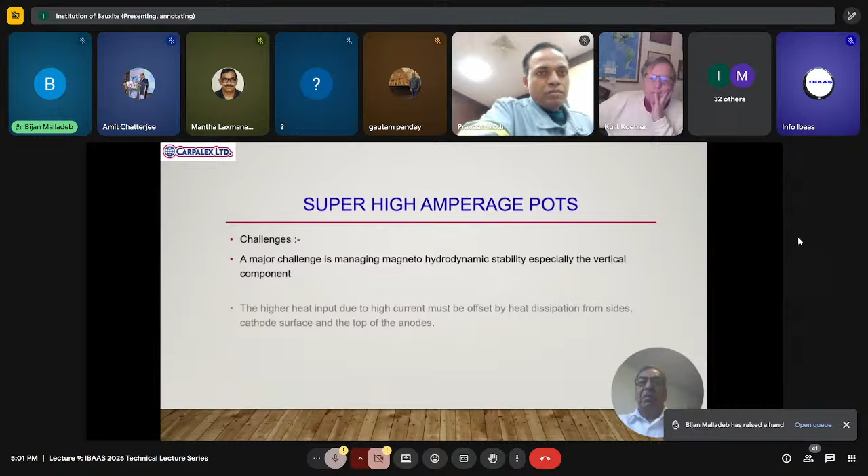What are the challenges? A major challenge is managing the MHD, the vertical component of the metal movement. Higher heat input due to high current must be offset by heat dissipation from the sides, the lining design, cathode surface and top of the anode. You are putting in more energy, and the heat has to escape, so it becomes a challenge in design. Also, less bath volume is available per kiloamp for dissolving alumina, because with so much amperage there's not enough bath volume.